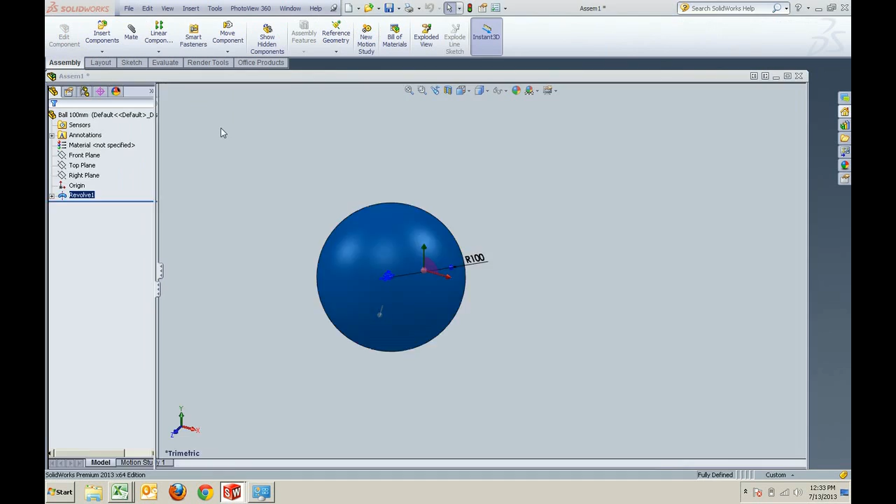This is a ball I created, 100 millimeters in radius. Simple, just a simple part, but you see there's a bit of a lag in loading just a sphere. So maybe it's time for me to restart and clear some RAM, but let's make an assembly from this ball. I'm just going to go with the default and drop it in there.

So we'll freeze that ball on the standard front, top, and right planes. And to start demonstrating numbers of parts as far as an assembly, what we can do is pattern, or just do some simple two-dimensional patterning.

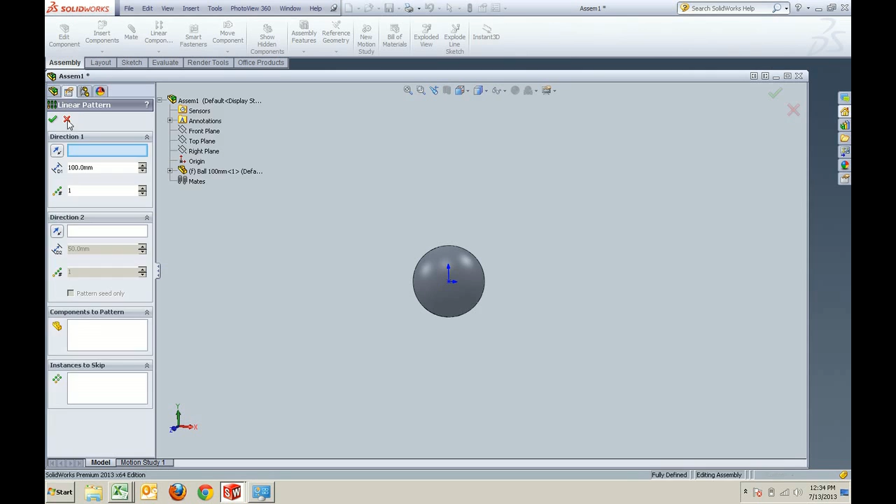I guess what I should do here first is put together some direction lines. There's probably a simpler way to do this, but I will usually just do a quick sketch using, in this case, the top plane. Throw a couple of lines on in the X and Y directions, because for some reason I can't get it to select off of the planes, but there you go.

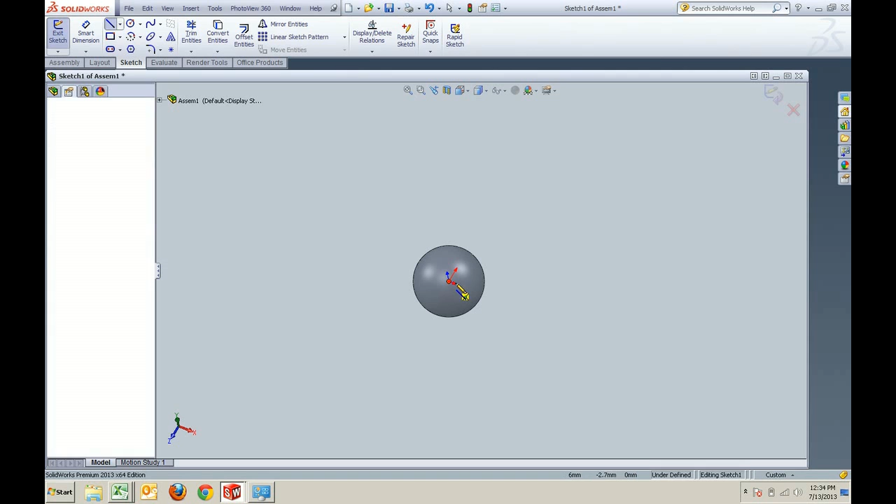Line number 1, line number 2, these guys end up being perpendicular. I'll just lock that in there as vertical, and now I've got my patterning directions.

So let's go up and pattern this, starting off small. Well, actually that spacing may be a little bit off because this is a 100 millimeter ball, but let's set the direction. I'll set one axis as a direction, then set the second line for patterning the other way.

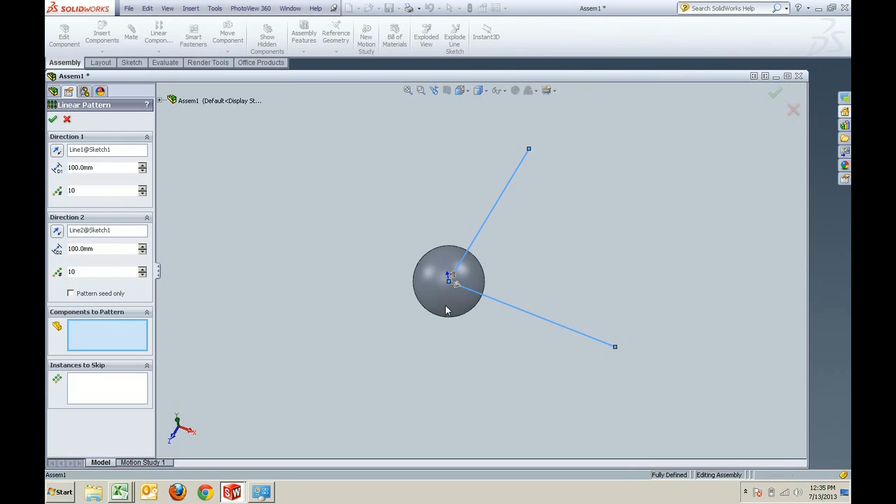This will create an assembly of 100 pieces. So yeah, it looks like it's overlapping a bit, so we'll create a little bit more space there and take that up to 150 millimeters between the centers of each of those.

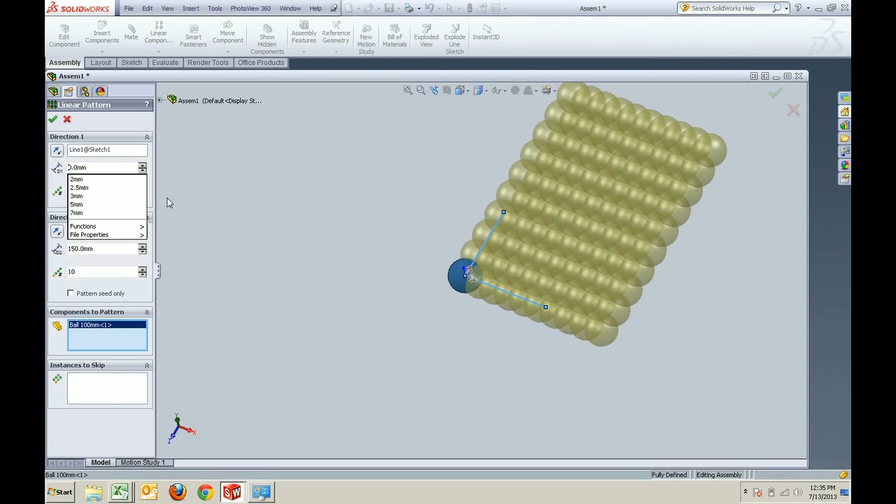Yeah, let's have a look at that. So 100 pieces, and let's just set that into place.

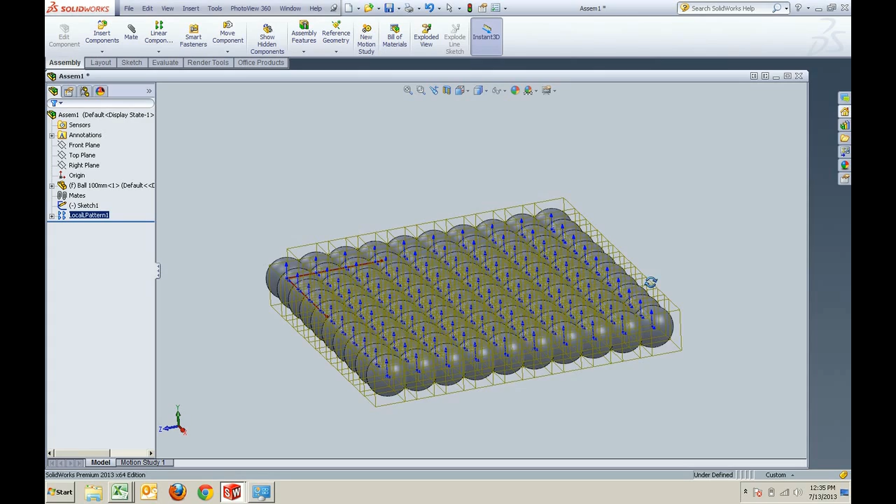What I want to do is just show you what the rotating is like on this, still using the trackpad, and you can see a little bit choppy at first. Zooming in and out, yes, using the trackpad, but a mouse would probably be just as jumpy. But yes, 100 pieces now.

So 10 by 10 spheres. I guess I could make that a little bit prettier, but no, this is the start. Let's give it a little bit more space in between those, I guess 200 millimeters, so you can actually get the full surface, making this assembly a little bit more complicated, but marginally, still with the same number of parts.

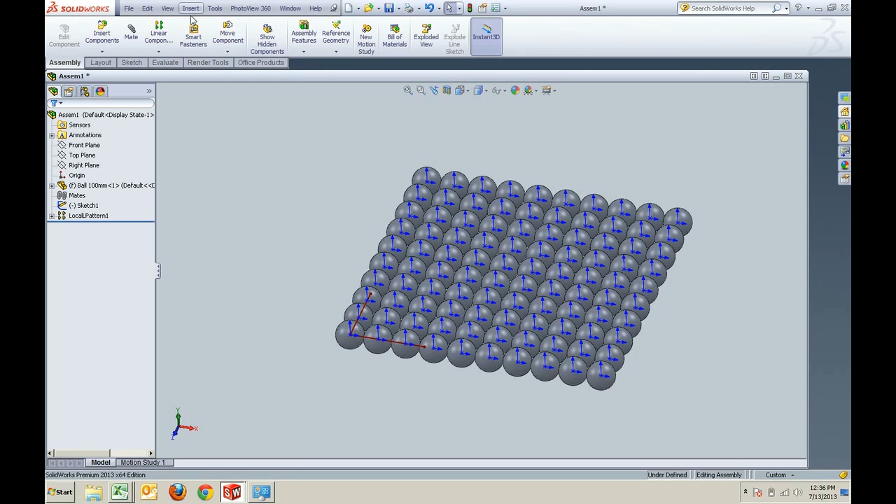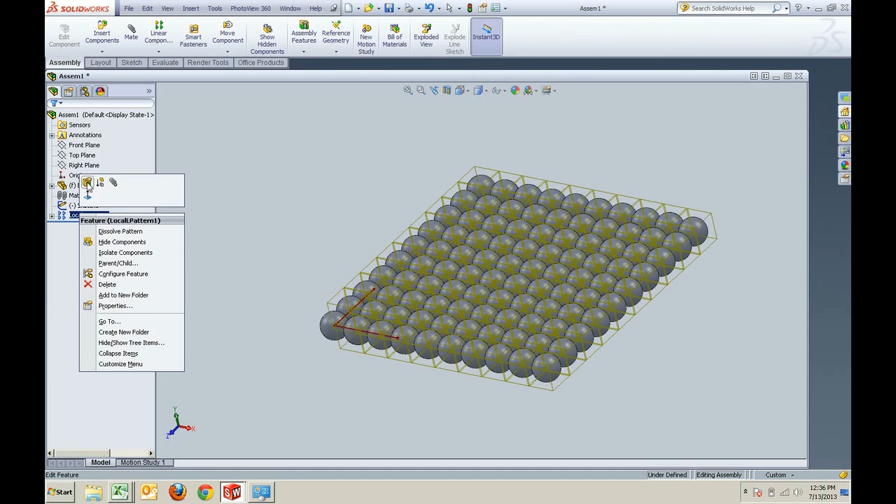And what's happening here? Yeah, so a little chunky with the zooming in and out. I did strip the graphics down on this, so you might notice from the icons on the bottom that I'm not using all the Windows 7 Aero features, so that I can still get things to be fairly snappy on this machine. I also don't like looking at all those origins of the individual parts, so I've hidden that.

So let's just bump up the quantity here, essentially going from 100 pieces up to 225. So more than doubling the quantity of pieces here, and now when rotating, you can notice that there's maybe a little bit more lag with the jumpiness there.

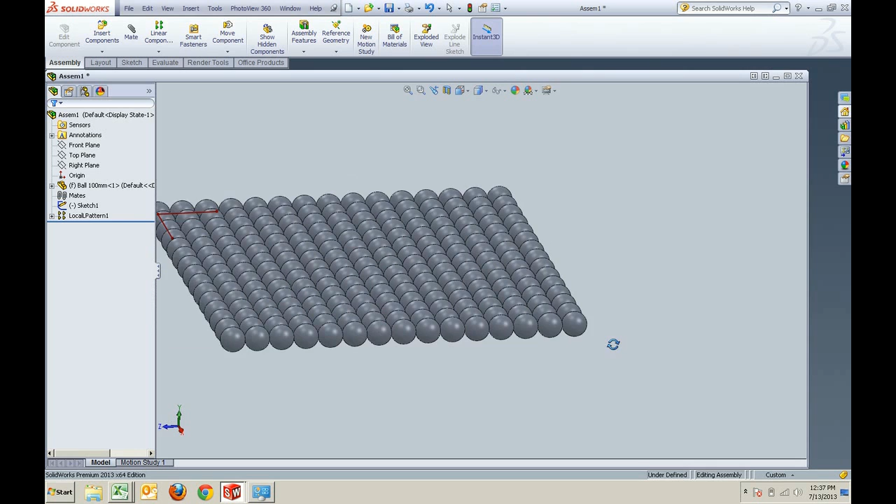Zooming in and out, a little choppy, still functional. So 200... 225 pieces. Yeah, I guess it depends on what you're typically doing for assemblies.

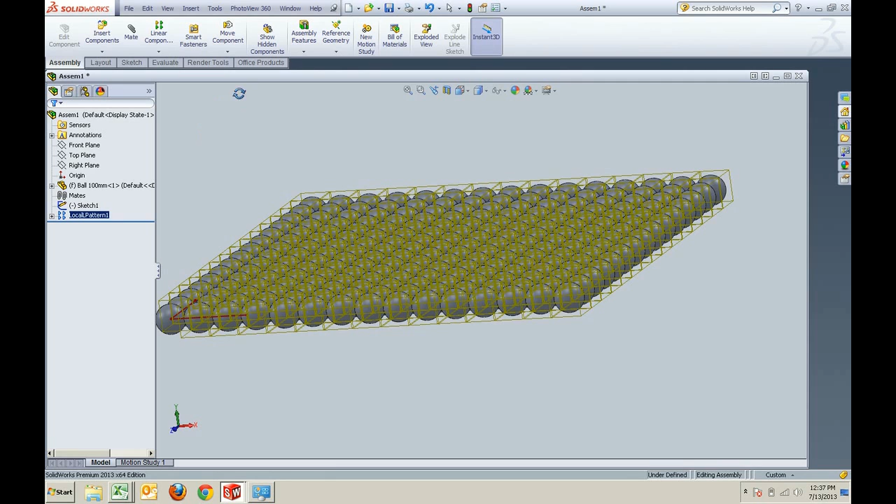But yeah, 225 is not bad. So if you're looking at patterning a bunch of pieces, maybe that ends up being... no, never mind, you already get the feel for it.

I'm just going to drop in another piece so you can see if there's any issues, maybe a little bit jumpy to move around here as well. But yeah, just a little cone that I made, about the same diameter. I guess I could have made that bigger to match better with the spheres, but cones, spheres, you get the idea.

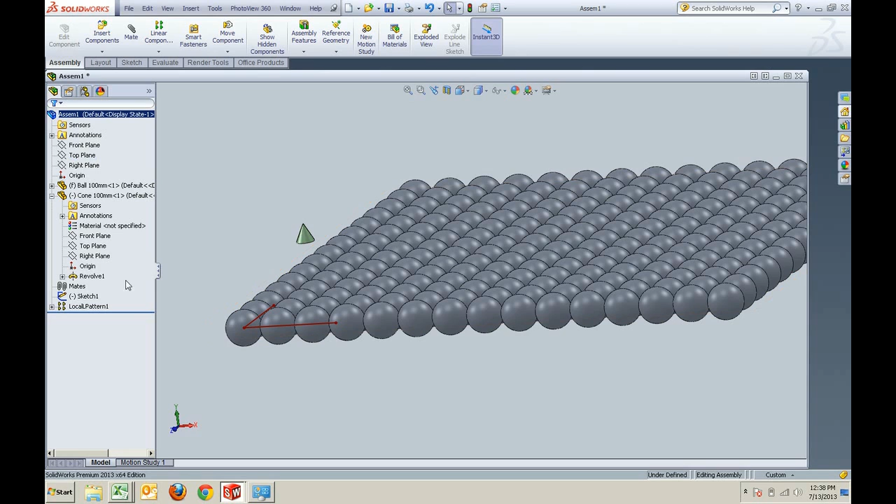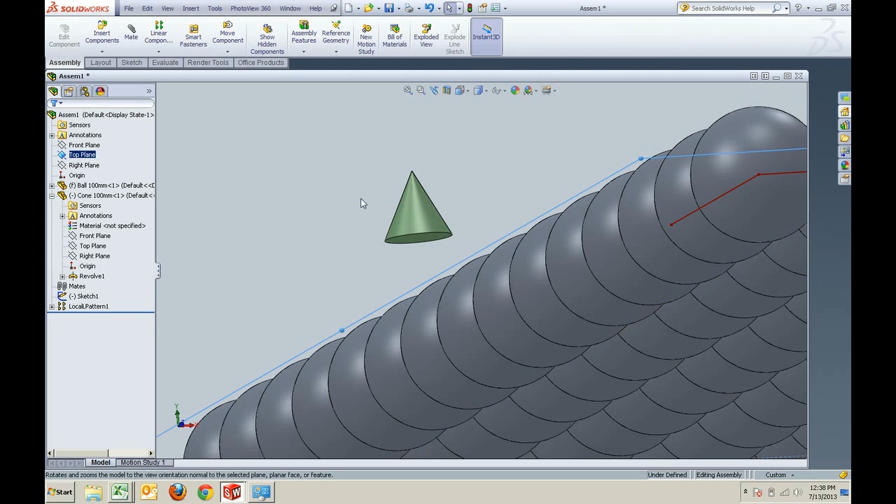So as far as mating that up, what I'll do is offset that from the top plane. As soon as I can get at the bottom to select it, I like to look at my surfaces rather than doing the select other, especially when using the trackpad. But that's just me. So we'll offset this by 300 millimeters, just so you can see the definite difference between the two shapes.

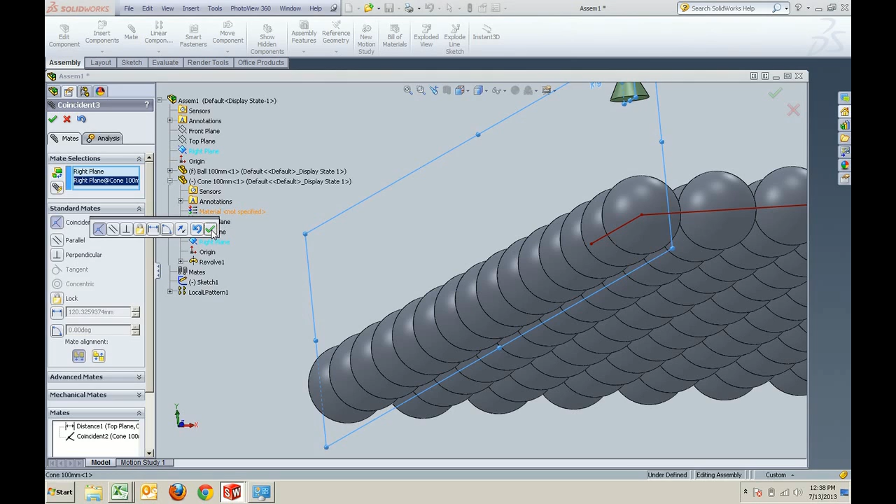Well, not necessarily two planes, but a definitive difference between the two shapes, so they're not conflicting. And I'll just line that up with the right and the front plane as well, to put it right over top of that first sphere that I laid down.

And now that that's in place, we'll rotate that around. You can see we're still, well, still chunky. It's not going to get much better.

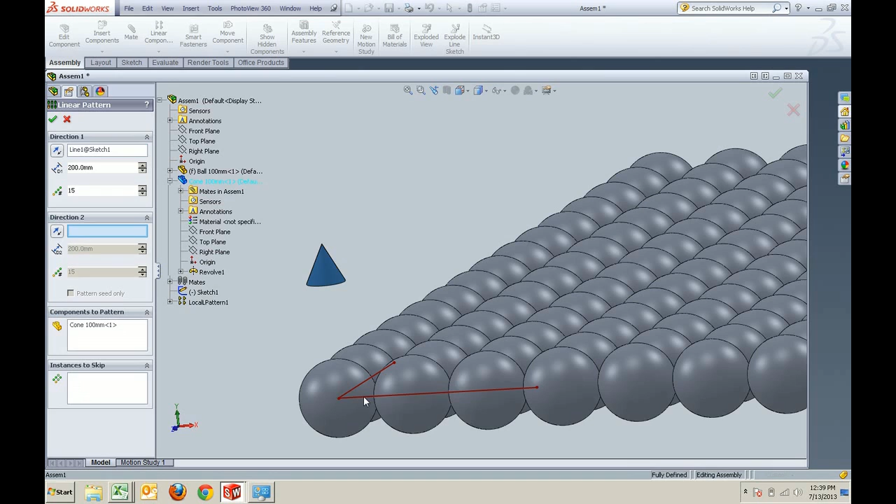But what we have now is, I think I was just going to go and pattern this, to show you what the assembly looks like when doubling up on parts, two different parts, not just patterning a single piece. This is one of the simplest ways to show large assemblies. So 225 balls on there, now 225 cones, a total of 450 parts.

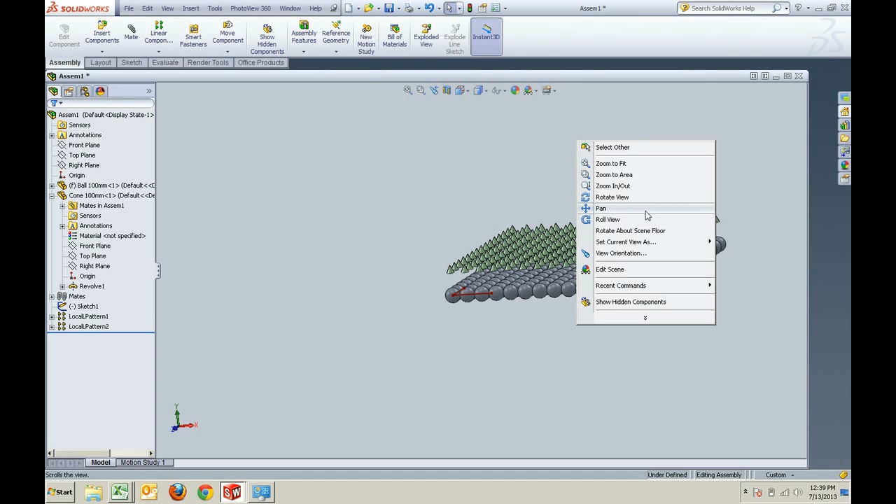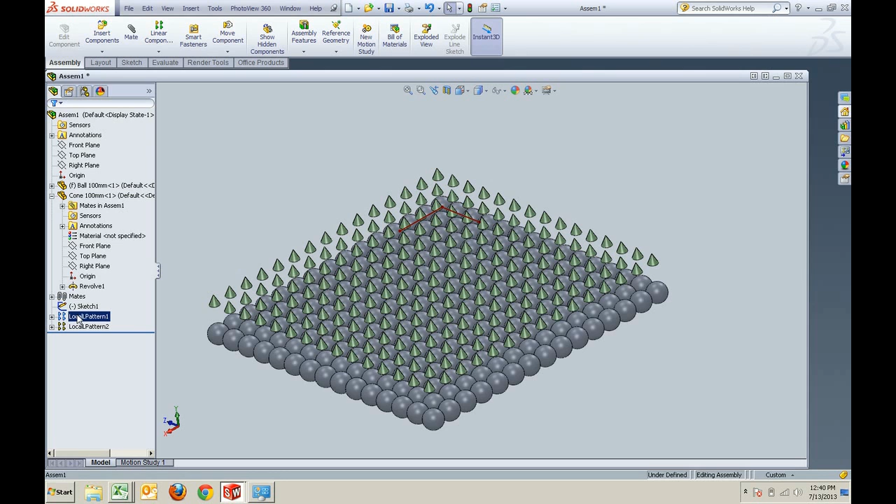And you can see how this rotates, so still not bad, still very functional. So now that we've got this, let's do one more thing, let's just push it to the limit here. Well, maybe not to the limit, but get it up into larger quantities.

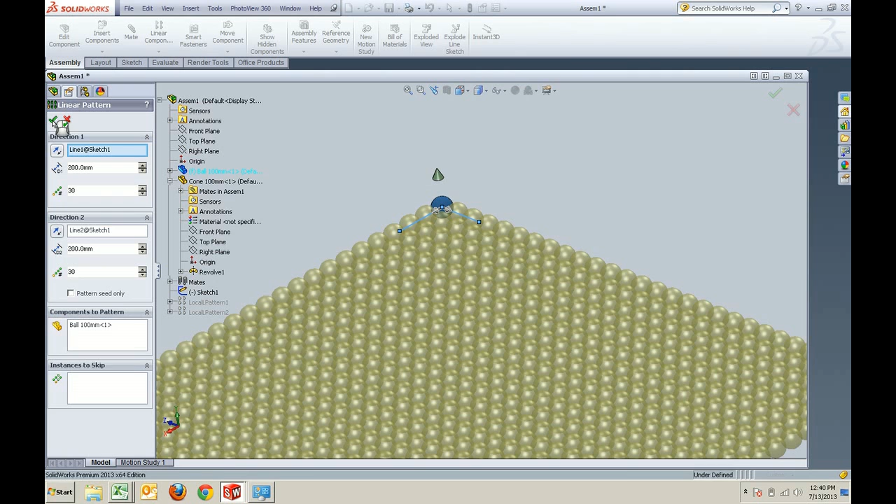So let's do a matrix of 30 by 30, so 900 balls, and we'll just do the same for the cones, taking it up to an 1800 piece arrangement. Just give me a moment here while I adjust these.

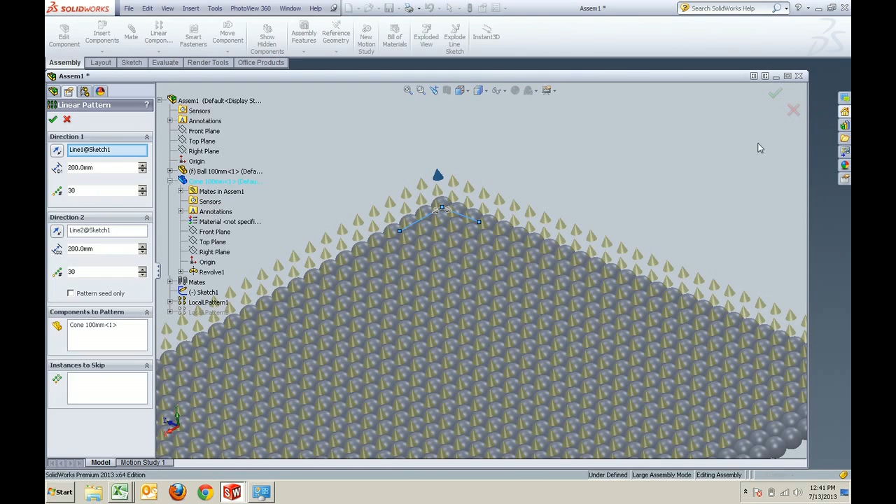But here we go, and it seems to be taking a little time in order to process that, but here's 1800 parts in a linear arrangement, 30 by 30, and here's your rotating.

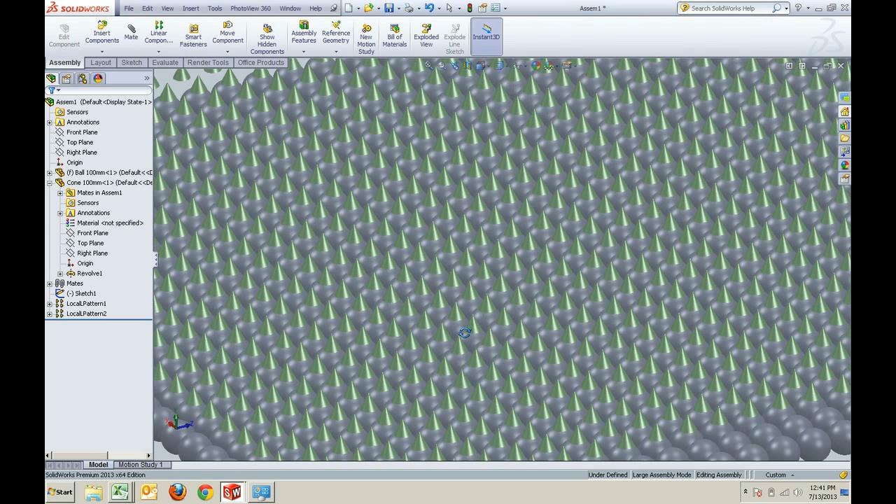So it takes a moment in order to register. Zooming in and out is chunky, much chunkier than with the smaller groups. So this will give you a feel for what 1800 pieces looks like.